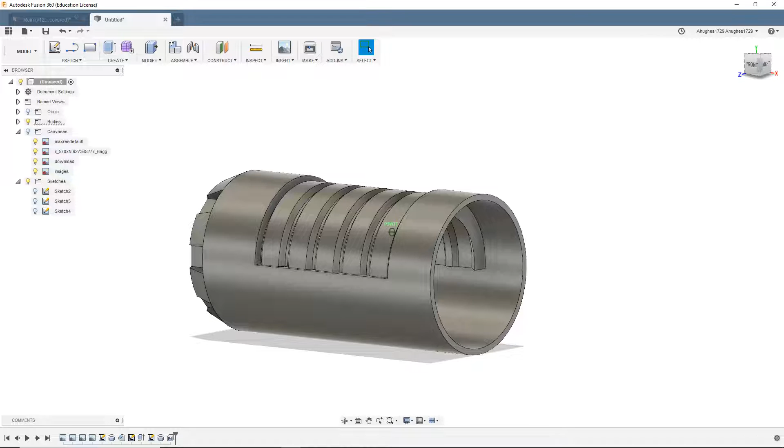In our last video we left off completing the main body that you see here. We hollowed it out a bit to make it easier to print. And now we're going to keep going. In this episode I thought we'd tackle this cage looking piece here.

The first thing I need to do is deal with this big gaping hole at the end of our main body. So I'm going to create a sort of lid that can fit on it with friction alone. After looking into it, I think I need to cut away a little bit from this main body so we have more room to work with. So we'll select extrude, select this edge profile, and cut it back a little bit. I think that should give us enough room.

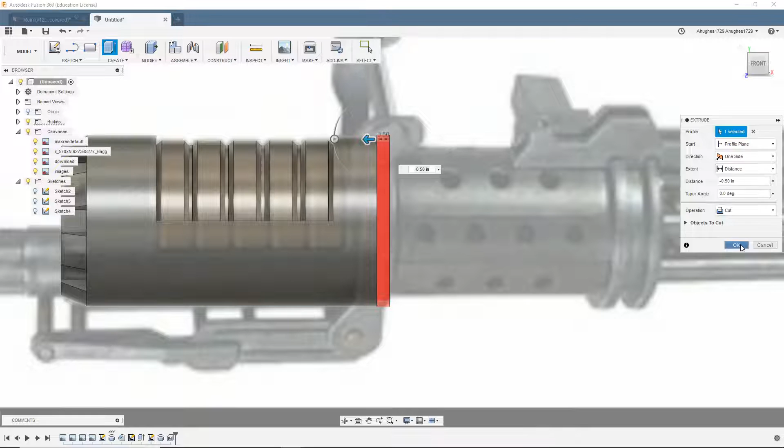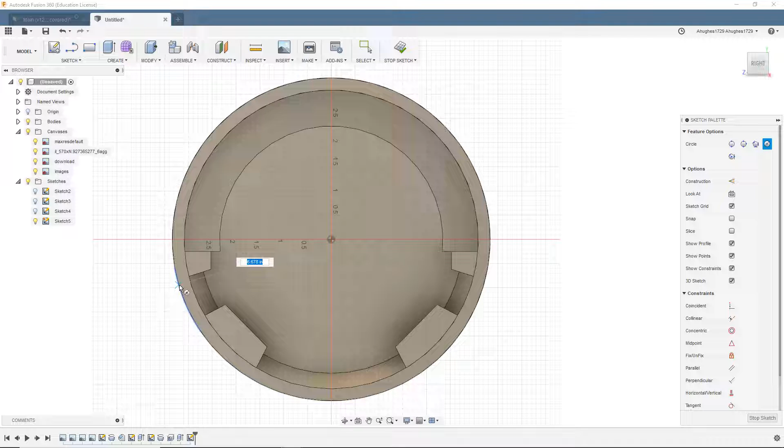To create the lid, let's create a sketch on this face. I'm going to add a circle using center diameter circle. Select our center point, go all the way out to this edge so it will be a good lid for us. Okay, there's our outer circle.

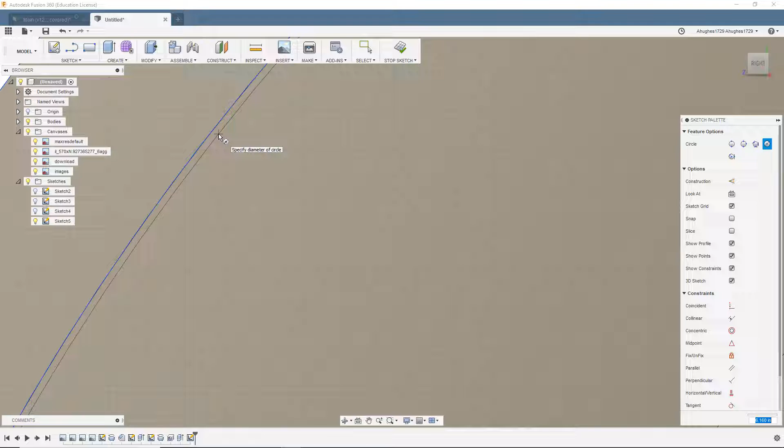We're going to need an inner circle, and one more circle that's just most of the way to the edge. I'll explain why in just a second.

Let's get rid of our canvases for now. Let's create the part that's going to fill this hole. This is going to go inside.

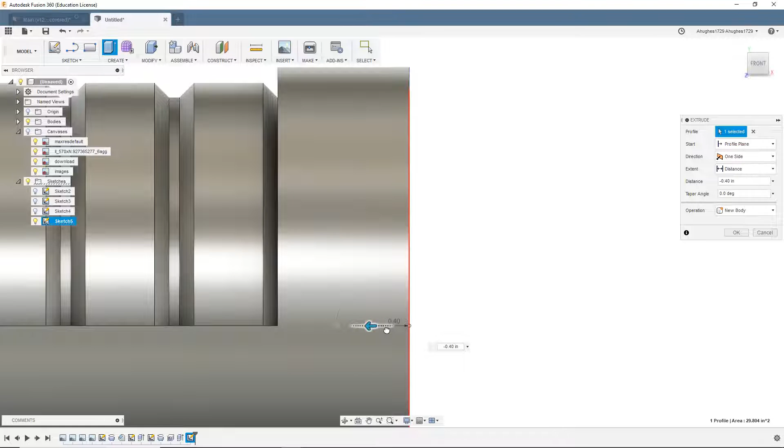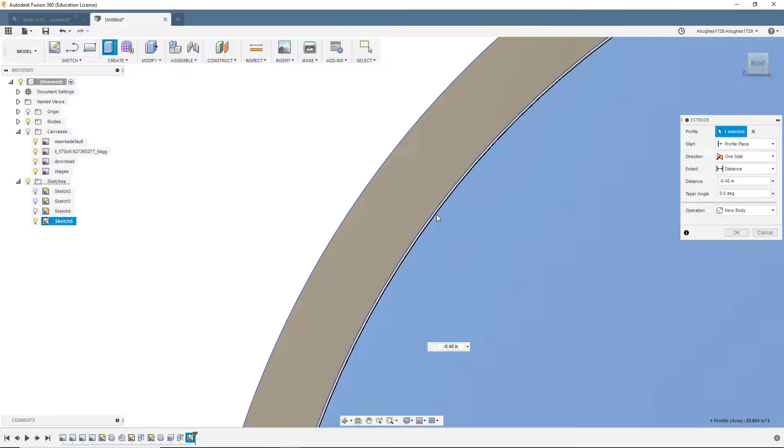Now, the reason I didn't go all the way to the edge of the circle here would make sense if you're just modeling. Unfortunately, when we go to print this thing, we don't want it to be exactly the right size. Otherwise it's going to be a real pain trying to get it to fit. We're okay with it being a little bit smaller than it needs to be so we can push the thing in and add glue if we need to. When you're 3D printing, there are very small imperfections in the object that you can't see, but you might have problems getting it to fit. That's why I didn't go all the way out to this outer edge when I modeled the inside circle.

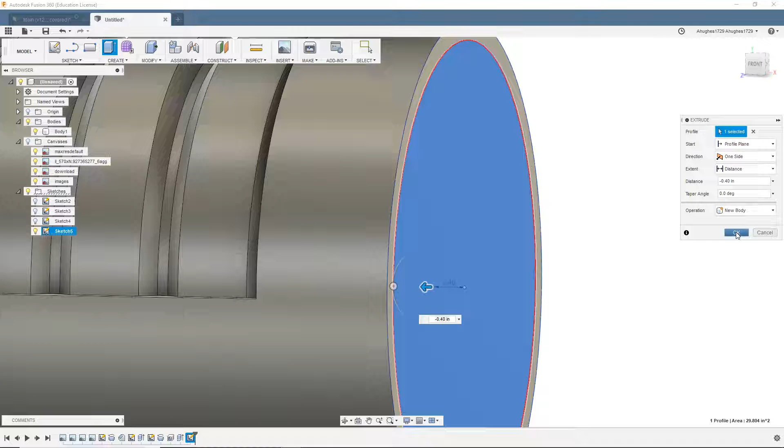You can't really see it, but this is going to extrude in, and we want it to be a new body so it won't be part of our main body. We'll hit OK, and if we hide our main body, we can see that it is now inside of it.

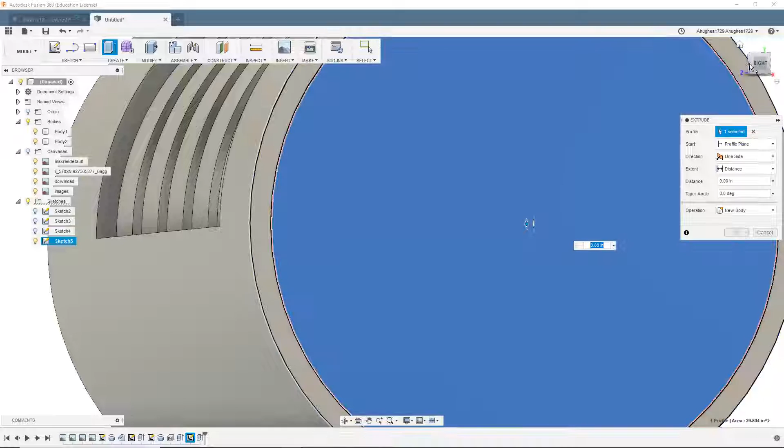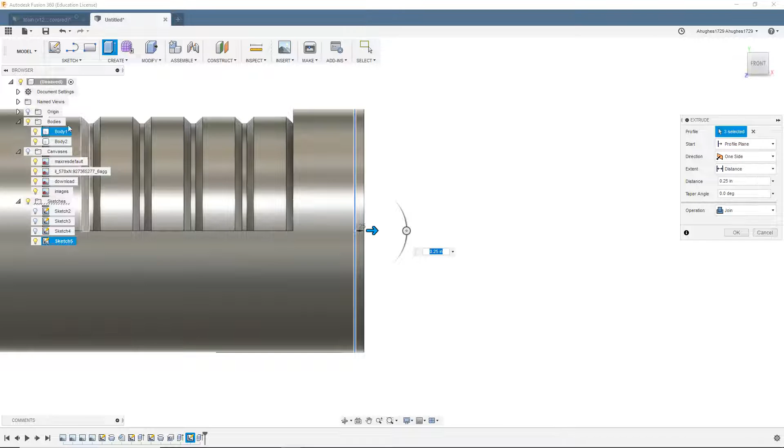Now we can model the top of the lid. Let's go to extrude. We need our last sketch back. We'll select this circle—actually we need all of the circles so we have a complete lid. We'll go out about another 1/4 inch. We want it to join with our other lid object, but I'm going to hide the main body so it doesn't try to join to that. So we'll hit OK, and there we've got our lovely little lid to cap off our main body.

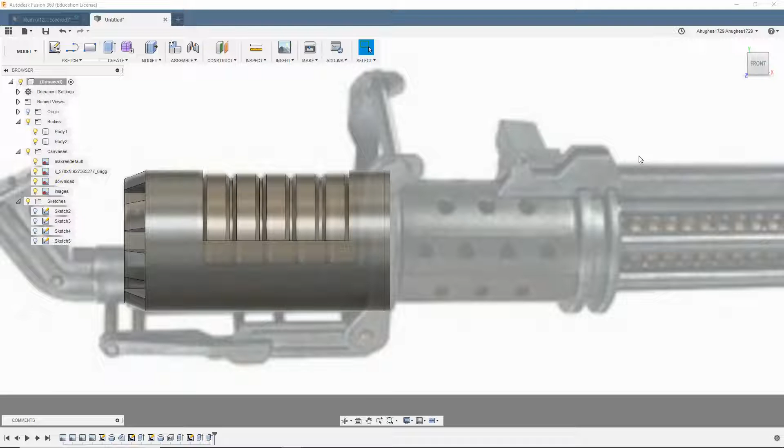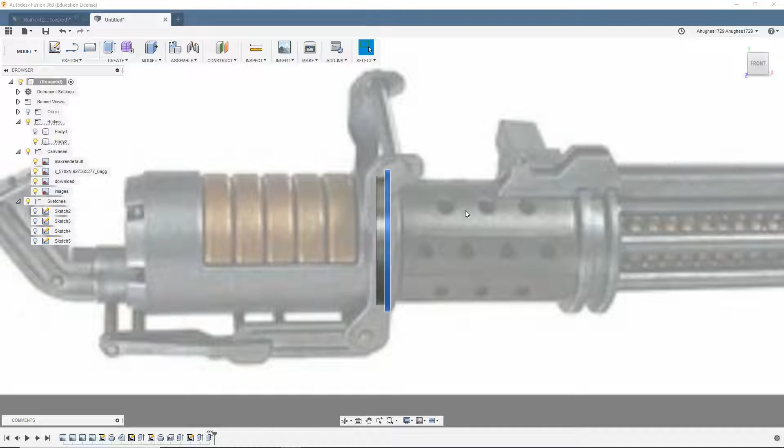Next we need to tackle this cage here. The way I think I'm going to do it is to create an inner body that connects to our lid, and then create an outer shell that will slide onto it that includes all these little holes you see here. That way the holes aren't completely see-through and you have a nice base to compare it to. So let's get to sketching.

We need another sketch. Let's go on the XY plane, add our center line that we're going to need. We want our inner body to be a little bit thinner than our outer body, so I'm thinking we go somewhere like in here, go all the way to the edge there, and then drop down. I think we also want to include these two rings to this body, so I'm just guesstimating here, bring it out and down, and we'll go out again, bring it up to the same height, and back down.

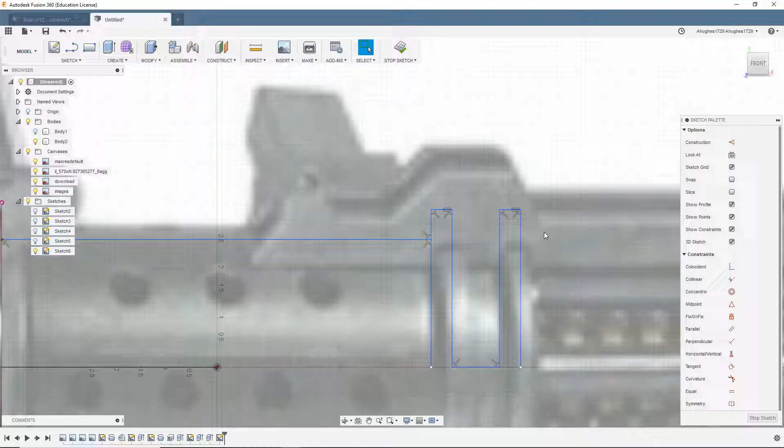Now, I didn't make sure that these two lines are equal. So what we can do is go over to these sketch constraints here. We can select equal, and you select your first line, select equal, and that will set the second line you click on equal to the first. So there we go, now we know they're exactly the same. Now let's just close off this body here so that we have a nice profile.

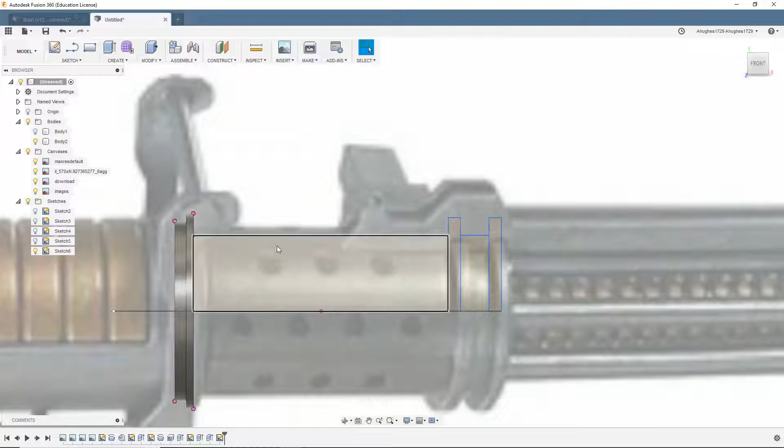Okay, we've got our profile here. We can go back to create and revolve. Select our center axis.

And there we go, looking good.

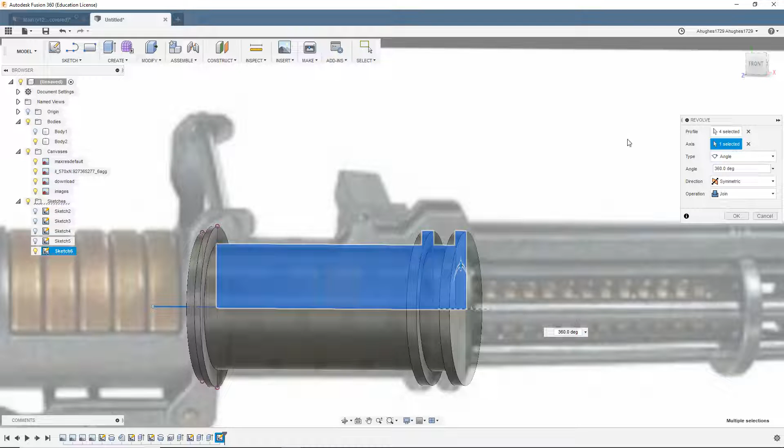Now that I'm thinking about printing it, I might actually make these rings separate, because when you go to print this, you have to consider the amount of supports needed. Say we place this end on the print bed, rotate it here. We'd have to add a ring of supports around here to handle this ledge, plus more supports up here for this edge, and more on this edge. If it's just a straight cylinder, we can print it without needing supports other than down here.

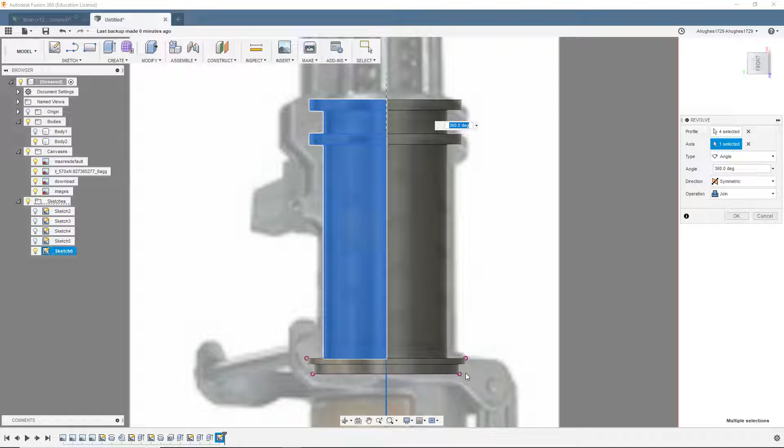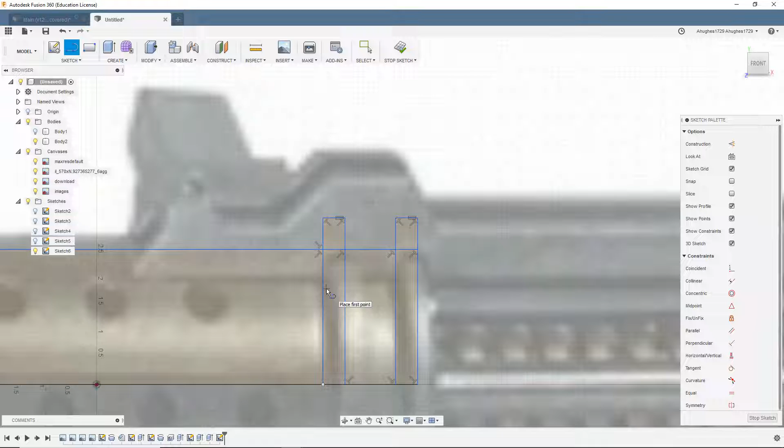Let's go all the way around. So let's cancel that, revolve, and edit this sketch and draw our lines in there. Now we can revolve again, just those pieces.

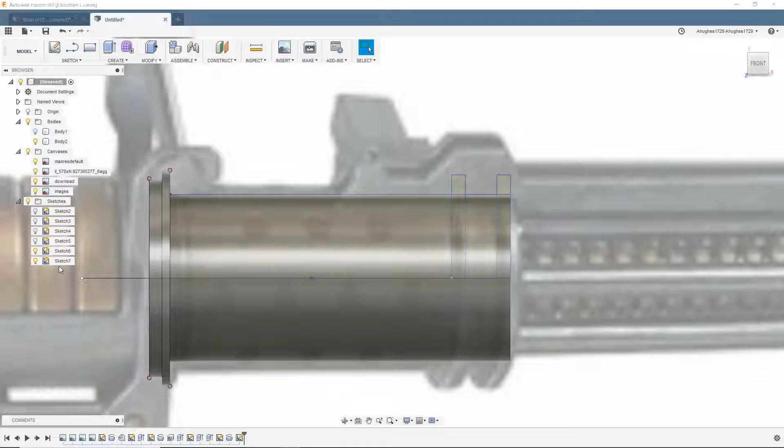And we'll join it to the lid piece. Okay, now we can go back in—oops, not create sketch. We will want to—oops, what's going on? Delete that last one and edit this one.

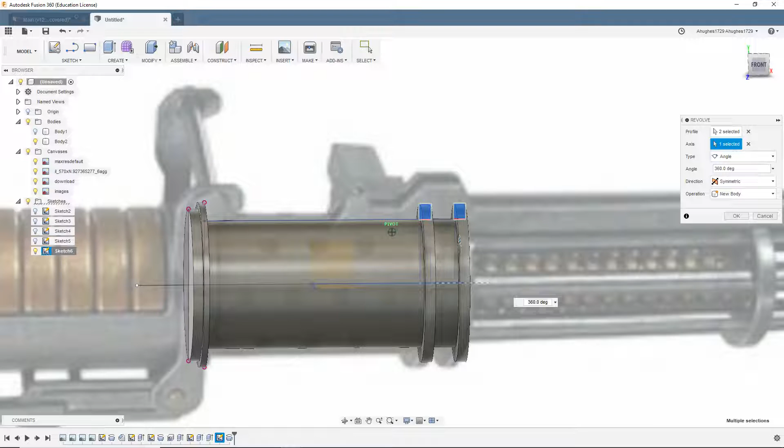So like earlier, we're going to create these rings, but we don't want them to be absolutely flush with our main body, so I'm going to add a little tiny gap between the two. Now we can revolve these, and they will be just ever so larger than the main cylinder. We want them to be new bodies, just a bit larger than the main cylinder body, so it should be able to friction fit. Otherwise, we'll add some glue to fill in the rest.

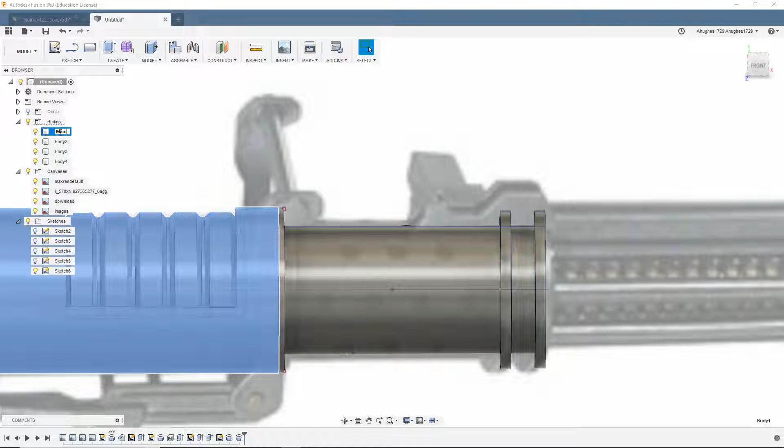Hit OK, and now we have these two lovely rings here. Let's go ahead and start naming these, because when we get a lot of bodies going it's going to be complicated. So: main body 2 will go lid and cage internal, and then we'll go cage ring 1 and cage ring 2. Helps if I can spell.

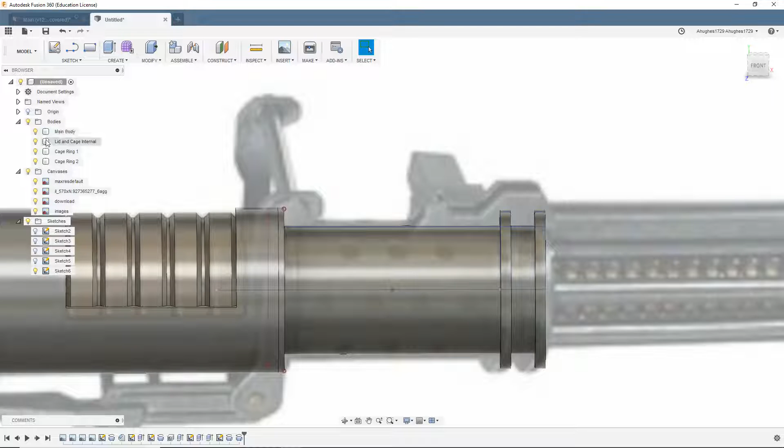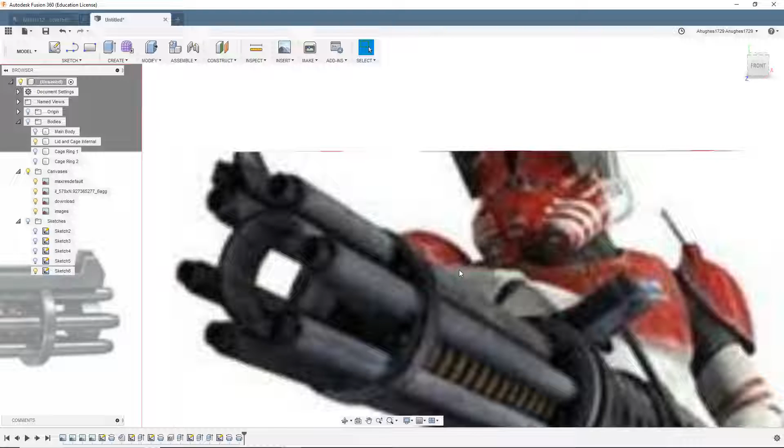All right, now we're going to build the cage with the holes in it, so let's hide all our objects. It looks like it has a pattern of 4 holes, then 3 holes, then 4 holes again. If we look at some other ones, that one has just 3 and 3, and that one might be hard to tell. I like how this one looks better—it's kind of an alternating pattern, and I think it'll be fun to make.

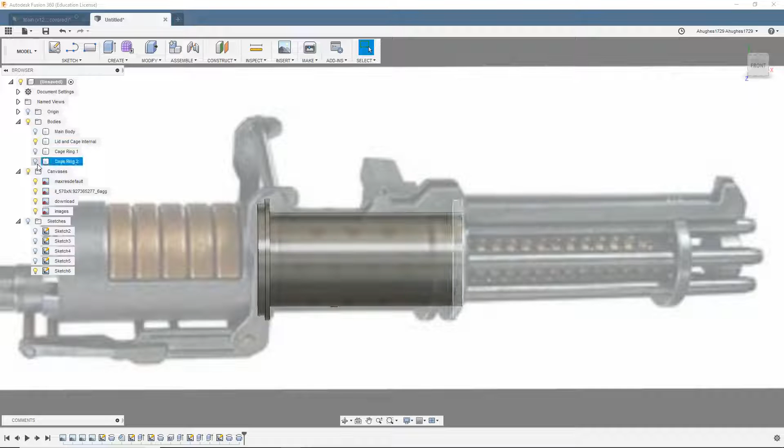So this is going to be a little bit trickier. Let's edit this sketch, and we'll add another line here. So we'll go to about right there and create revolve, and we'll revolve. Actually—

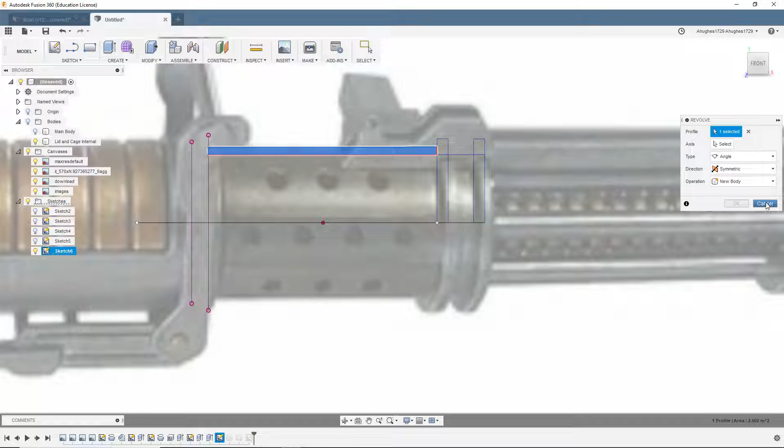We're going to want the same sort of idea as the others, so let's make this just a hair smaller than the other one. Perfect. And I know when you're 3D printing you can change the scale of an object to be a little smaller or bigger, but I like to have everything modeled so it fits right when printed, because nothing sucks more than printing the huge main body only to find out it's too big to fit together.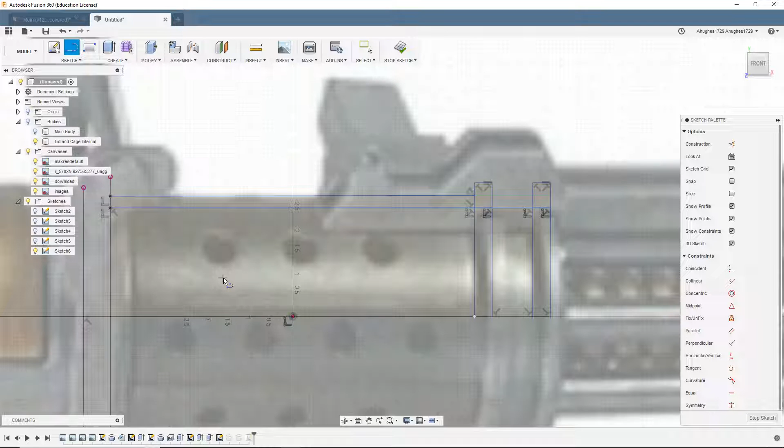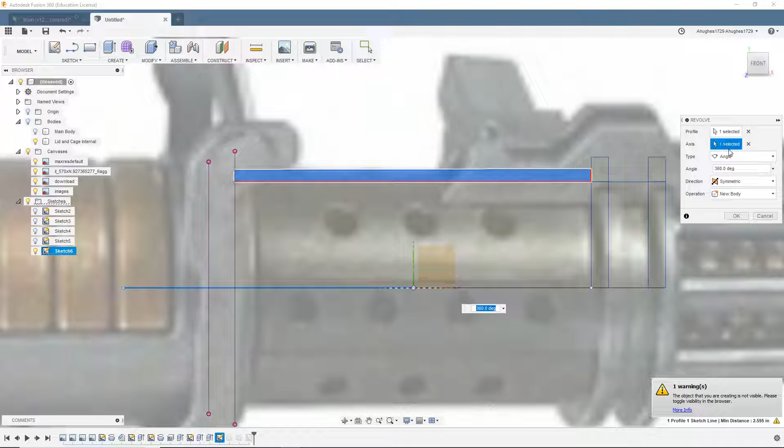So we'll go to create revolve again, and we'll have it not fill in that side over there, otherwise we won't be able to slide our rings on. Oh, the object's not visible—huh, there we go. We want this to be a new body; we don't want it to connect to our lid and cage. So there we go, that looks good. Stop being invisible. Okay.

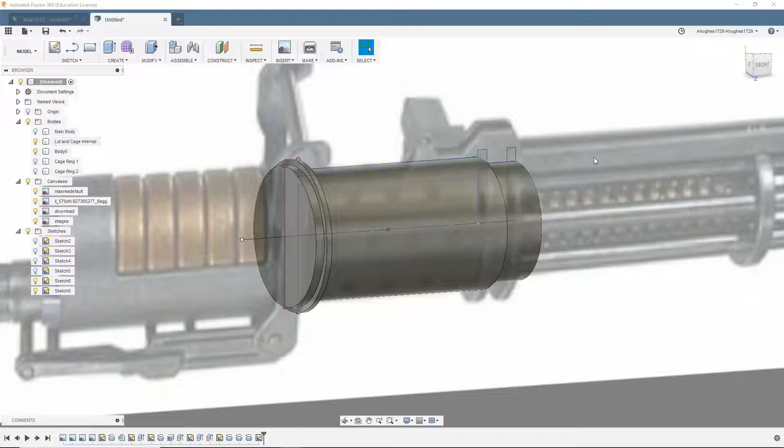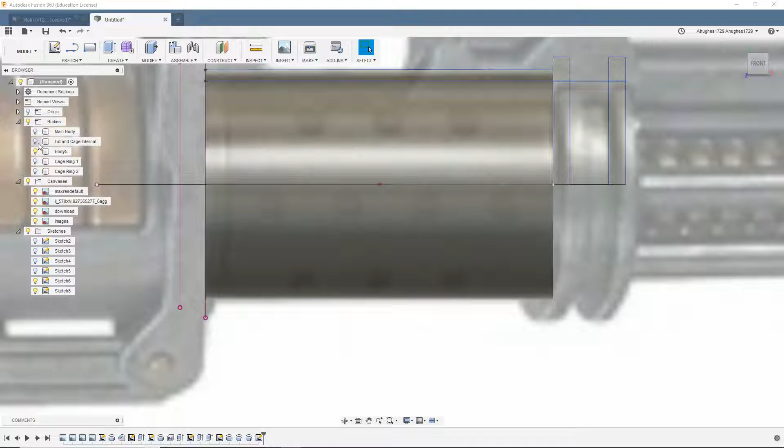So now we've got a nice sheath onto our lid and internal cage, and there should be a nice little gap between them. All right, get rid of that. Now we can start cutting the holes out of this guy here.

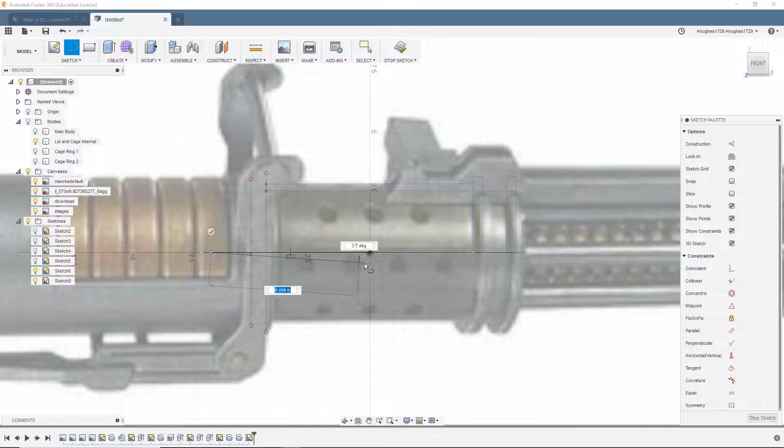So now we need to create a sketch for the holes we're going to make here. Let's do a new sketch, add a nice little center line, and go both ways. And we need a center diameter circle—let's try and get the center there. It's 0.750.

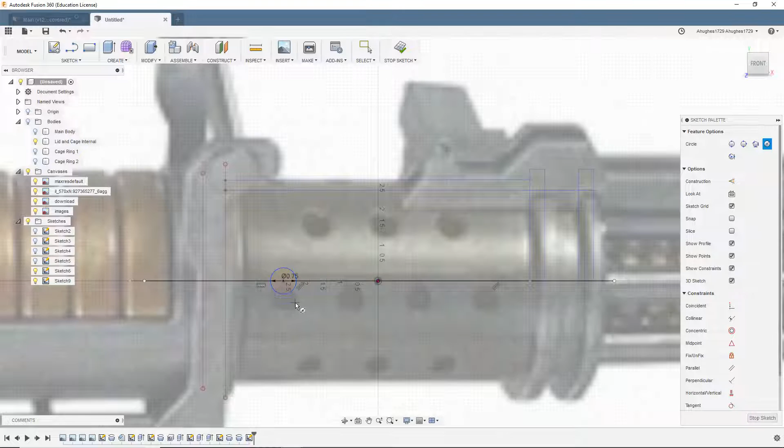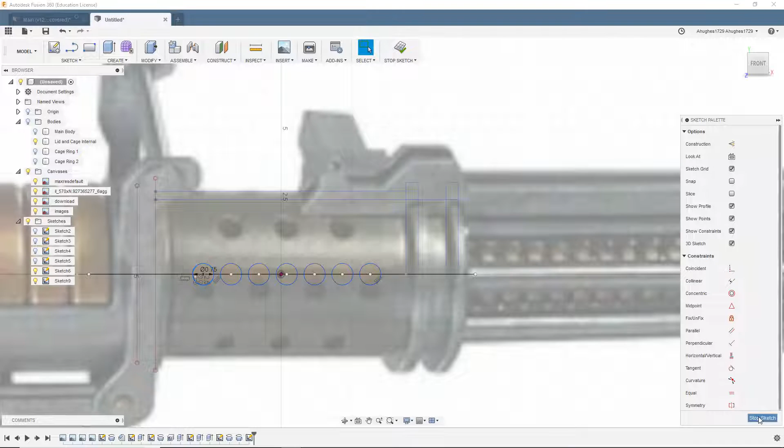You can see there's rows of 4 holes and then rows of 3 holes. So what we're going to do is a rectangular pattern and up this to 7, go all the way out and meet it with the last one. Yeah, good enough. That way, when we go to cut out of our exterior shell, we can cut out these 4 for the 4 rows and these 3 for the 3 rows. Now let's create and revolve.

Center axis—let's show it. We do not want it to join with the lid; we want it to be its own thing. So we select new body. And ta-da, there it is.

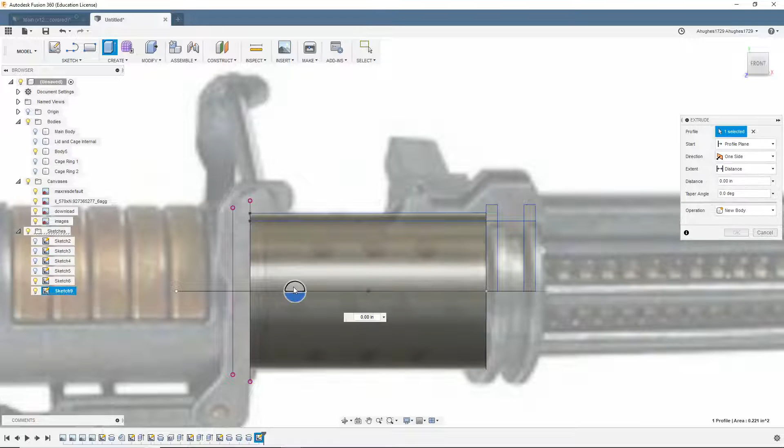Now we can start cutting from it to fill in the holes. So let's show our latest sketch, extrude, and we will—oops—let's hide that body, hide that sketch. Okay.

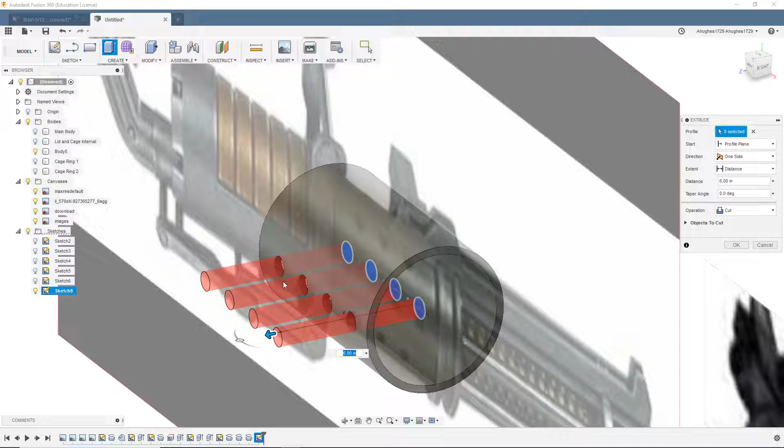We'll first extrude our 4 rows like so. You can see it trying to cut out of the external cage, which is what we want, but not quite yet. So what I'm going to do is select new body for these, and it's going to create 4 rungs for us, and it'll make sense later.

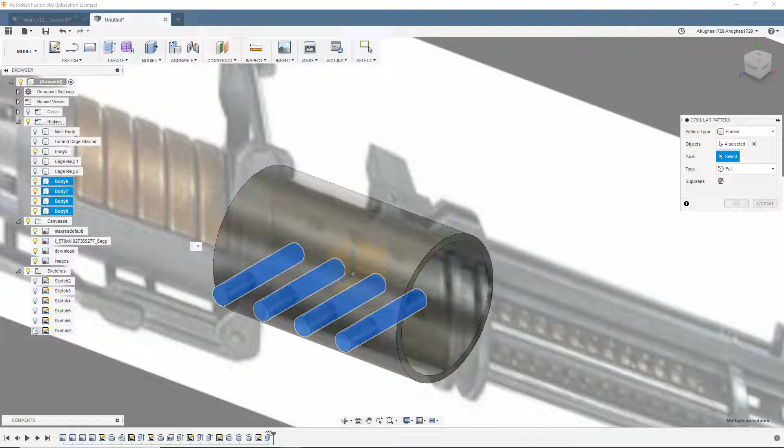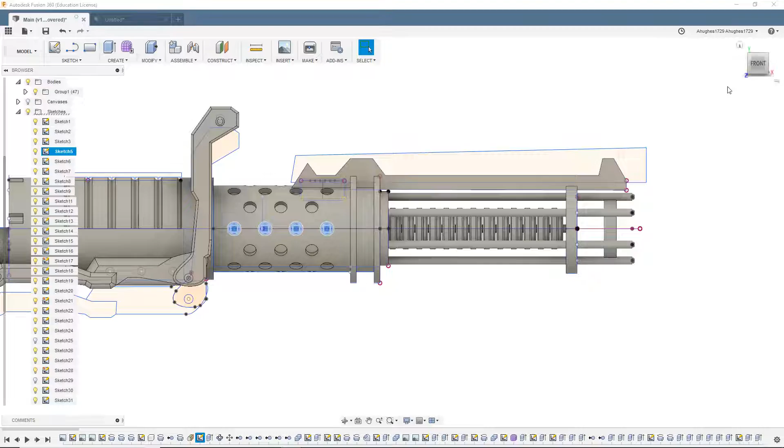So now select those 4—I don't know what to call them, tubes—and we'll go to create pattern. Just like our sketches, objects can be circular patterned, rectangular patterned, or even patterned on a path. We're going to go circular pattern, select, grab the center line, and you can see it's trying to create more objects. Let's up this—I think 5 might look good. Let's look at the other one, show the bodies. It's got 1, 2, 3, 4, 5, 6. Yeah, okay, 6.

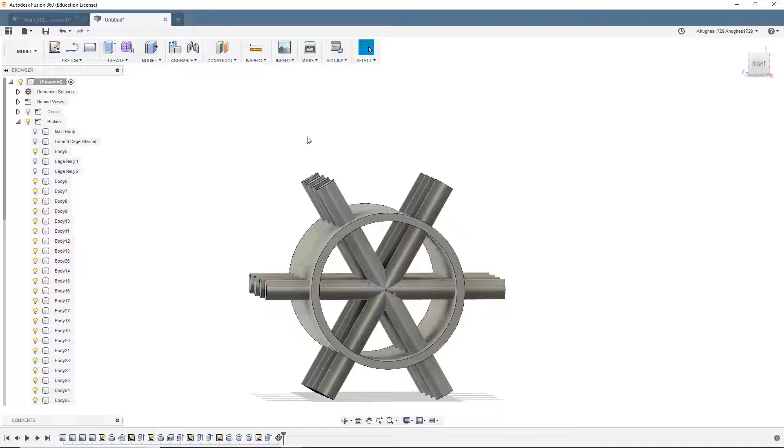And 6. Okay, that's going to create a lot more bodies for us, but that's okay. So now we can extrude our 3 circles. I really hope this works - I did it a while ago, and I don't remember how it worked.

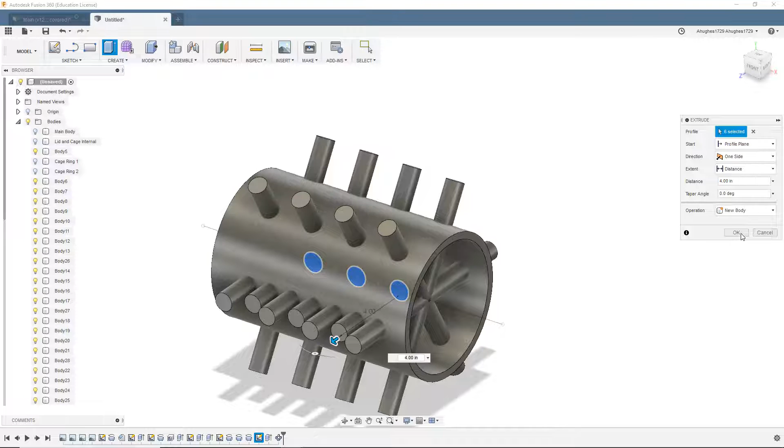So this is going to be new bodies. Okay, and let's circular pattern this again. Now we don't want it to be 6, because that's what the other one was.

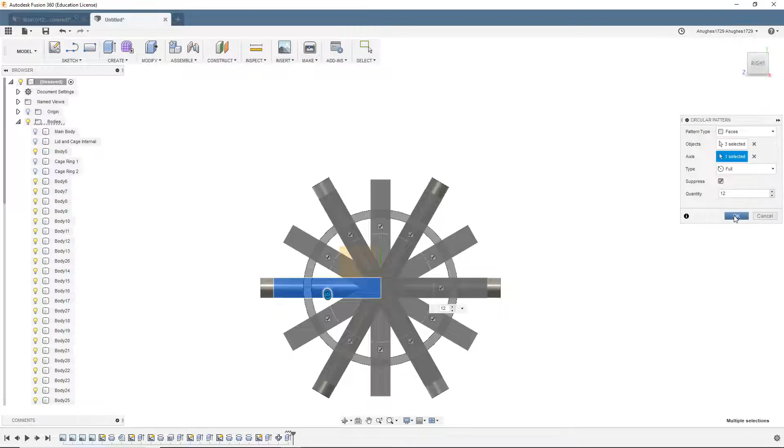So if we double that, it will create another - it will create the tubes in between the 4 tubes. So we had 6 of the 4-hole tubes, we're going to have 12 of the 3-hole tubes. There we go. That's a big mess right now.

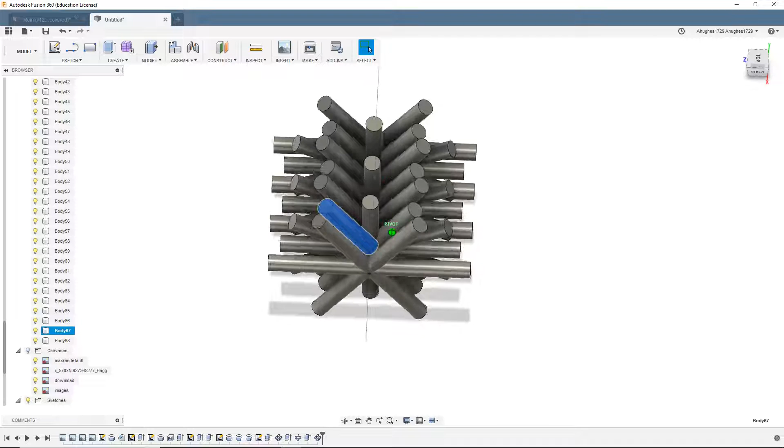Let's start cleaning it up. So let's start selecting bodies that we can delete. That's one - this is going to go all the way around in a circle. And we will delete every other one since they will already be aligning.

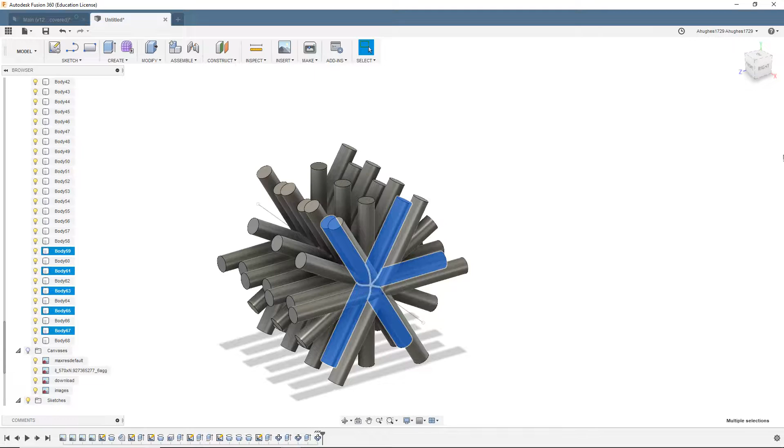Does that make sense? We need one more. Where are you? It's going to be way at the top because we created it earlier on technically. That's okay, we'll delete those. That deleted everything. Why?

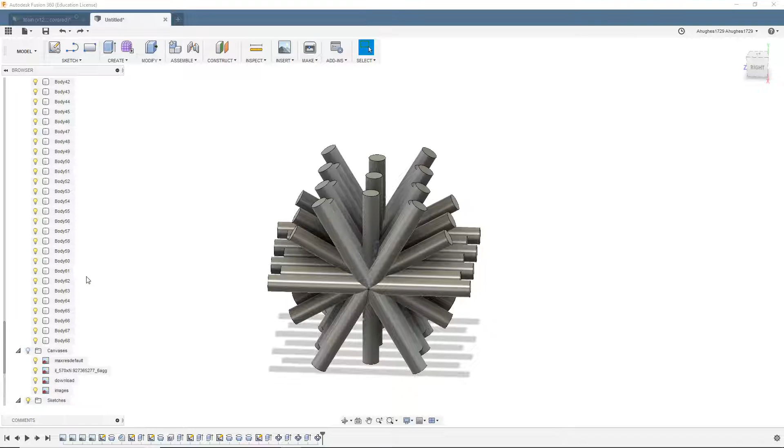How about remove instead? That's better. Okay, Fusion can be a little bit confusing sometimes - I am also not a master Fusion guy.

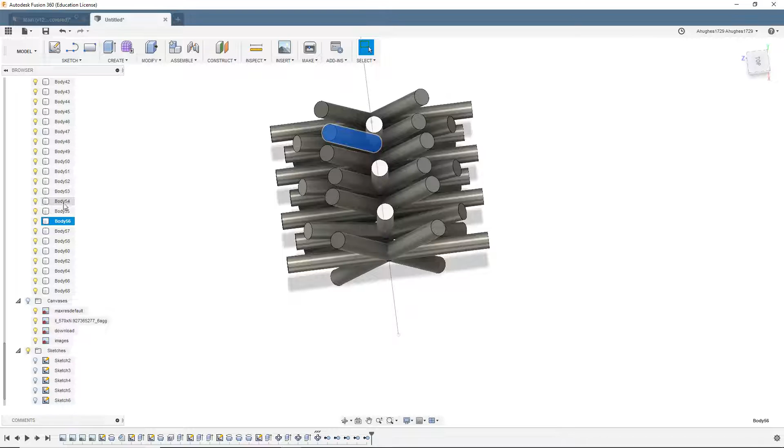So that's okay, we will remove those. And now we'll need to do it again - so now we're on the outer row. That one, that one, that one, and that one, and that one. So we're deleting all the ones where they are supposed to be a 3 row. So remove.

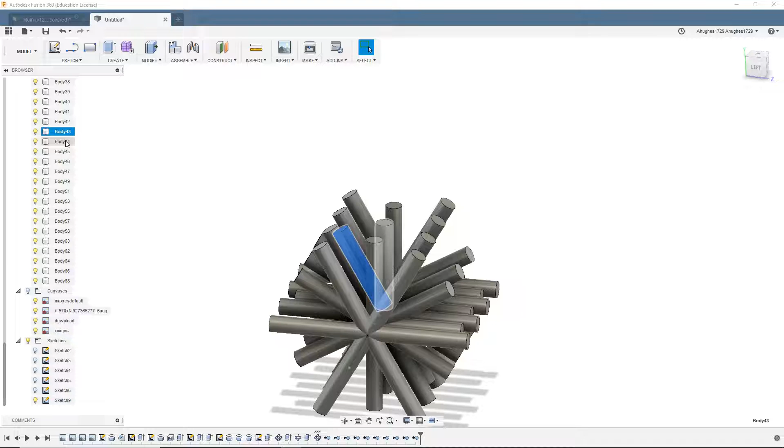Now, who are you? There we go. Okay, looking good. Remove. We've got a few stragglers. We'll remove you. And then remove you guys.

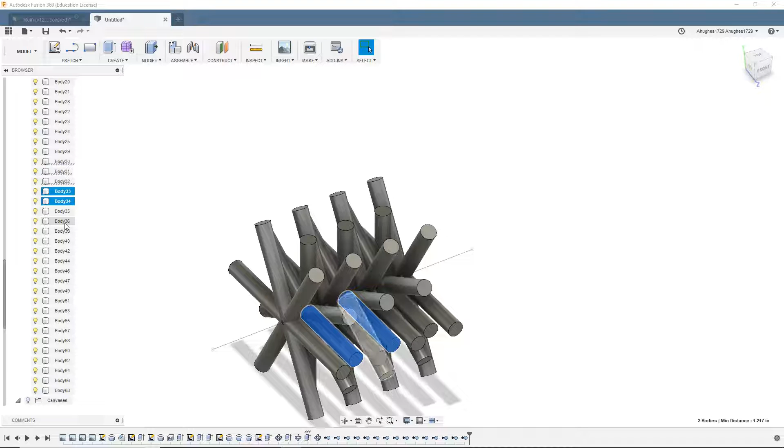That should be all of them. So you can see it alternates a pattern of 4, then 3, then 4, then 3.

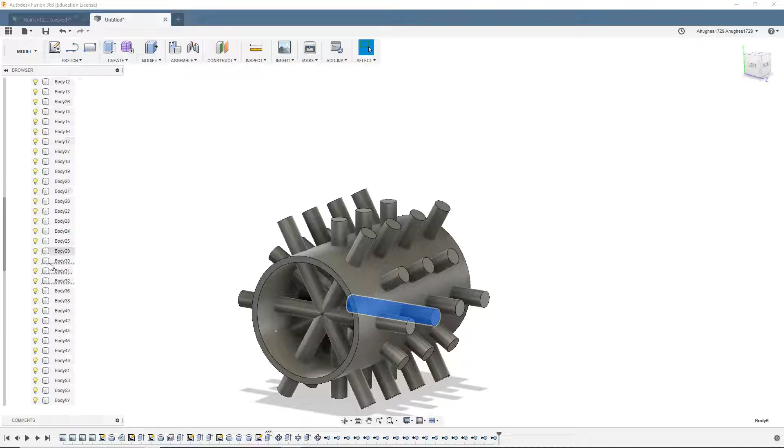All right, now we can show our main body again, and let's select all of our rungs. Oh, how do you Boolean combine in this? Okay, combine.

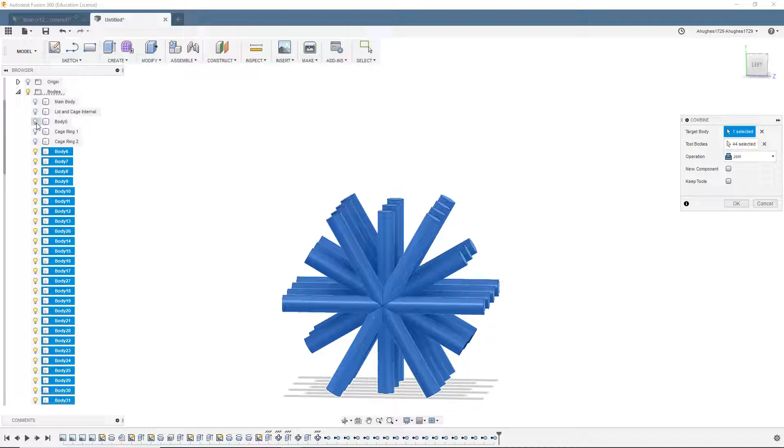We will combine all of them into one body. Let's hide our outer body there. We'll join them all, so the ones that are touching are now one body. So let's show that again.

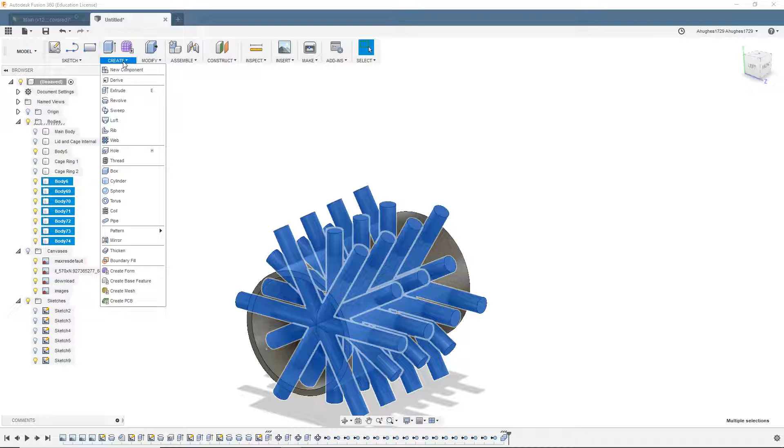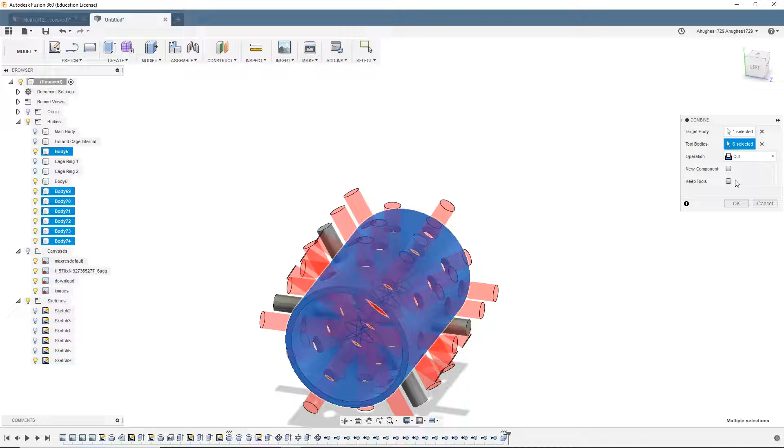I forget what we just did, or how we just did it. Combine - there it is, we will cut. So we got our tool bodies. There we go, we got our target body, which is the body that is going to be cut. And we got the tool bodies, which are the cutting tools, essentially. So select cut and OK.

And we missed some, that's okay. Modify, combine - this is our target body, and this is our tool. Okay, look at that - that's a nice holy cage.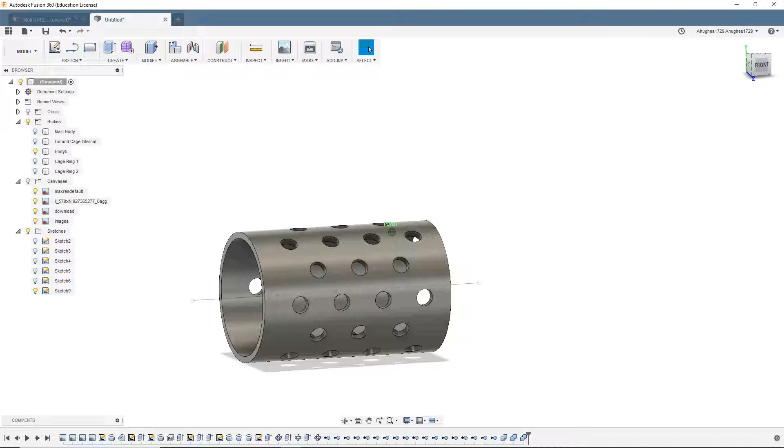And it's going to fit right over our little cage internal here. That is going to fit right into our main body. So all of these should slide together.

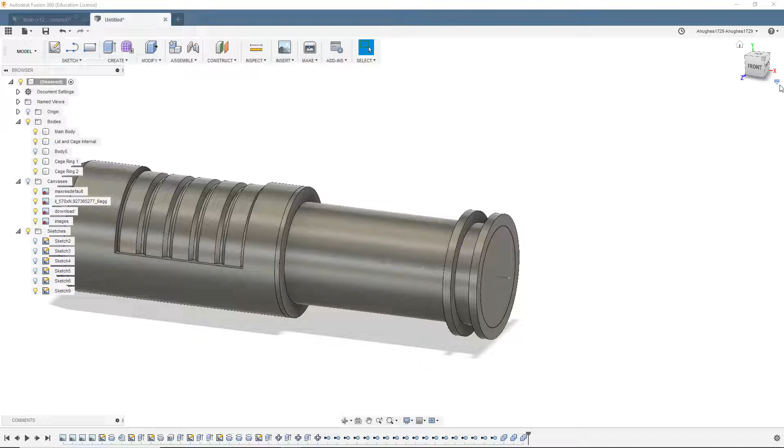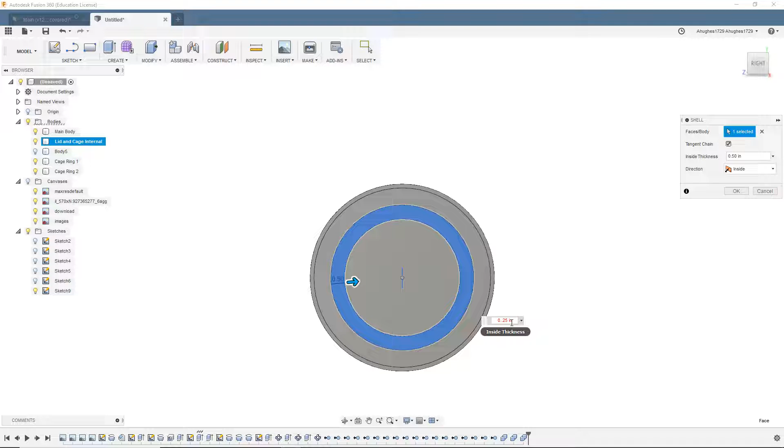One thing we will do is, like the main body, this is solid, so we're going to need to hollow it out. So we'll use our handy shell command, bring it in, maybe 1/4 of an inch again. Did it not like that?

There. That way it should be a lot easier to print.

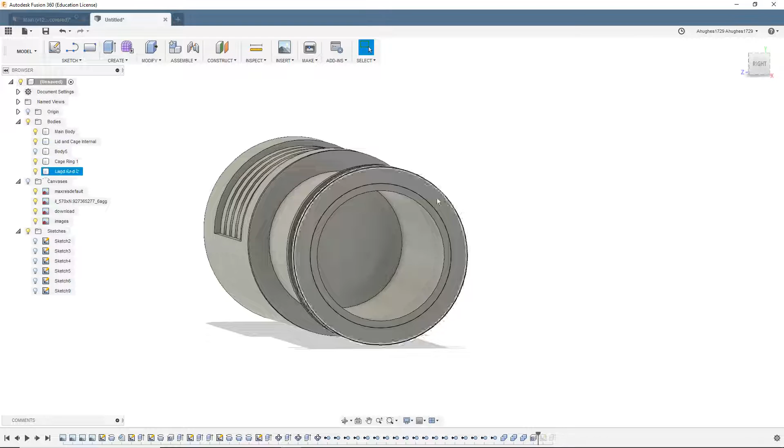Here is what we're going to do. We've got it shelled, but we also need a hole to the main body so that the motors and electronics and everything can fit through it, as well as make it lighter and easier to print.

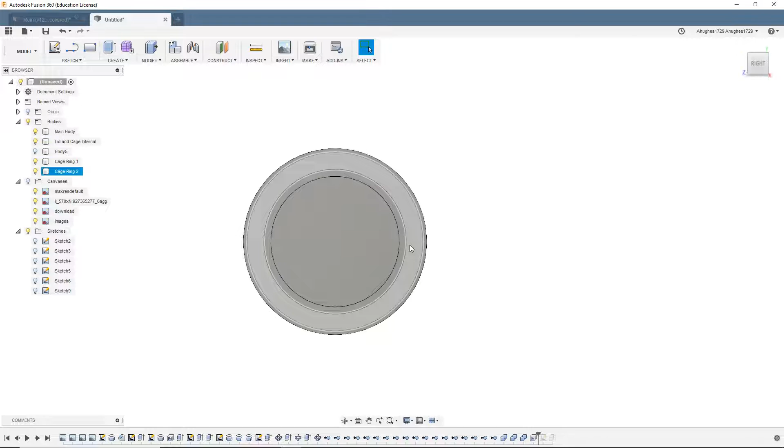So what we're going to do is take out half of it, leave half of it empty, cut out a small circle out of it so that the rod through the middle of the gun that's going to spin, that will spin all the barrels and everything, can rest in there, and maybe we can add a bearing in there or something that will reduce the friction.

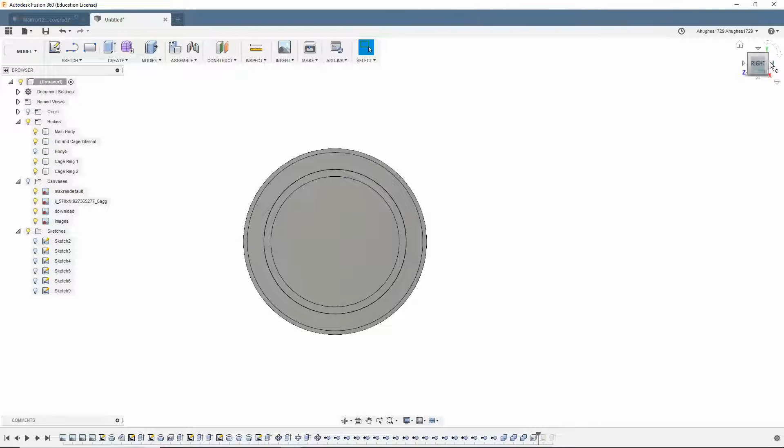So here's what I'm thinking. Let's add a new sketch here. We'll add a line down the middle. Oops.

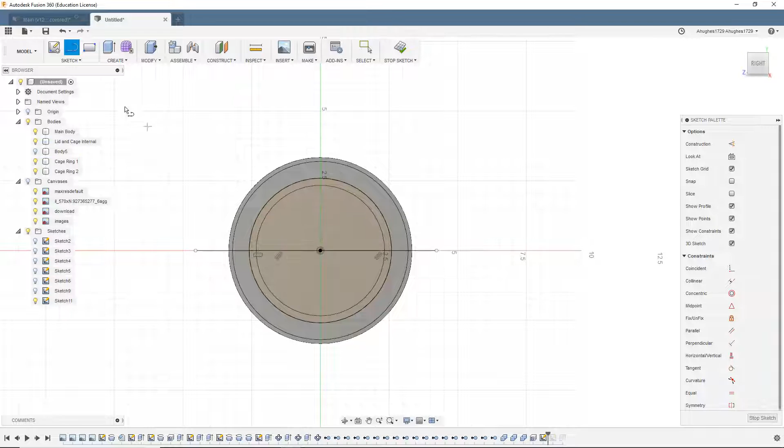And then a center diameter circle. I don't know how or what the diameter of the bearings we're going to use are. Right now I'll just go 0.75 inches, because that's going to be 3/4 - because that's going to be the diameter of our center rotating rod.

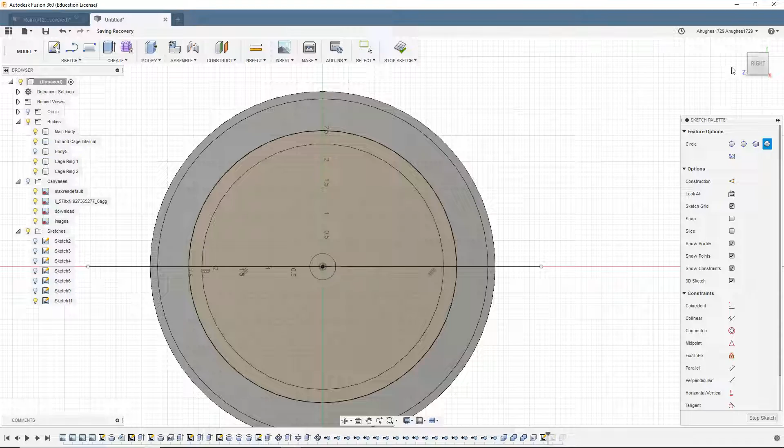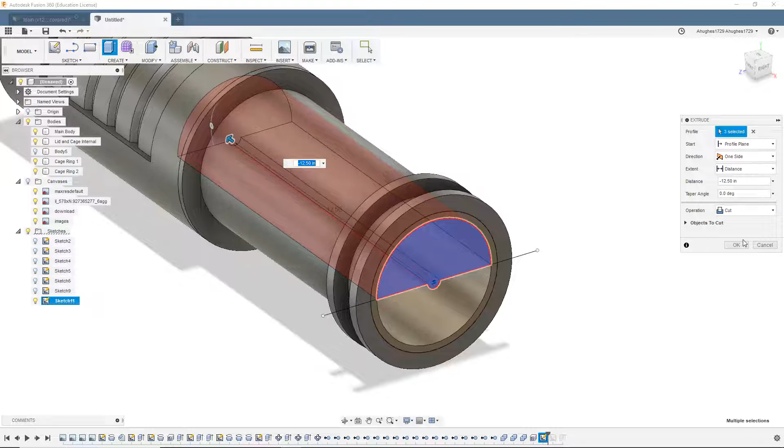So now we can extrude. We want this - actually we want this top half to be cut out as well as a hole. So let's cut the main body - actually, we're not cutting the main body, we're cutting the lid.

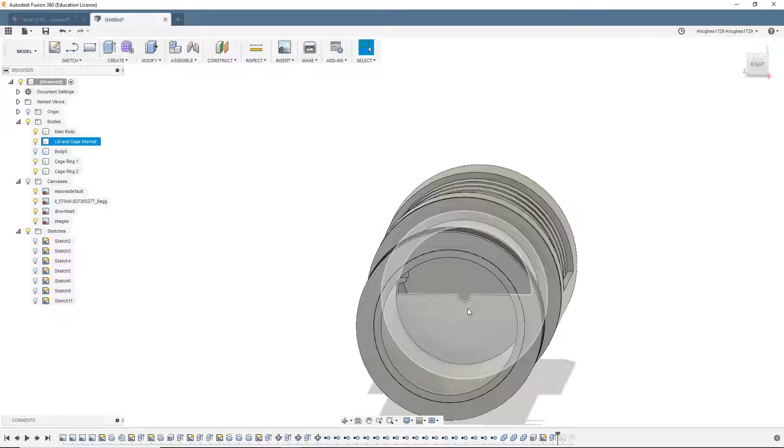So now we have a nice little hole for electronics to go over, but also for a place for the center rod to rest on so that it won't wobble. We can try and fix it to that place.

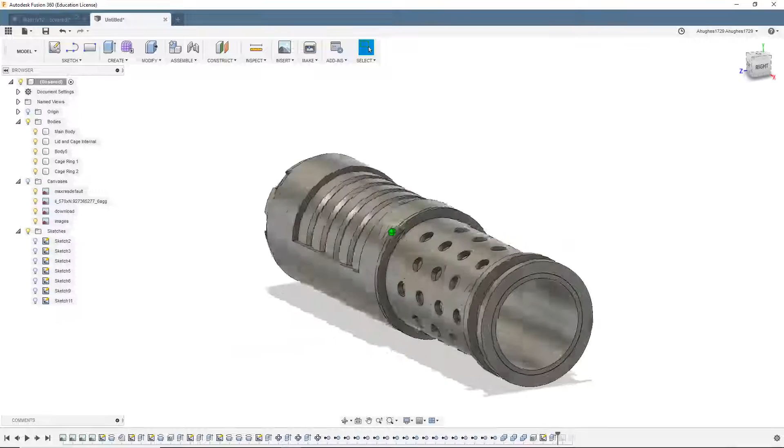Okay, I think that's enough for one episode. We got the cage in, we got the lid, we got the rings. That's some good progress right there.

In the next video, let's see what we might want to do. In the next video, we might do barrels - I think that'd be fun. I'd do barrels, the sight - I think that'd be a good goal for next video.